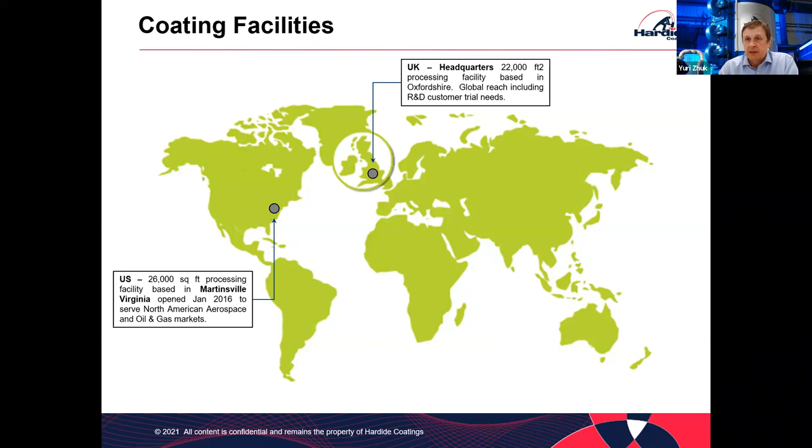First of all, to show locations of where we are working - I'm based in the UK, near Oxford, which is the headquarters of our company. We also have production facilities in Martinsville, Virginia, from which we serve the North American market. Hardide also has presence in Houston - Mark Anania, whose contact details you will have, is based in Houston permanently and is an experienced oil and gas industry expert. Thank you, welcome everybody.

We use a low temperature CVD at 500 centigrade. Typically we coat parts about 2 foot long, but we recently installed a larger reactor which allows us to coat up to 4 foot long components. Typical thickness of the coating is about 50 microns, so 2 thou, and hardness on the level of about 73 Rockwell C - so it's about 1300, 1400 Vickers. So it's pretty hard.

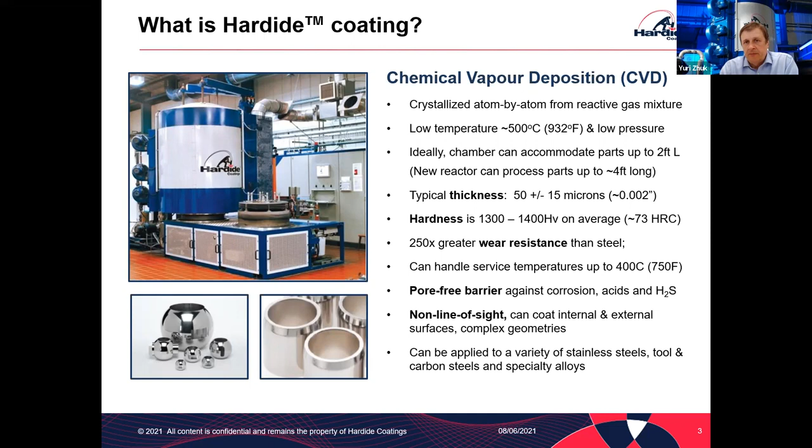As I mentioned, the coating is non-line of sight, so we can coat internal surfaces, external surfaces, complex shape parts, and we can coat a variety of steel components - stainless steel, tool steel, carbon steel, nickel-based alloys, copper-based alloys - various metals. We coat metals mainly.

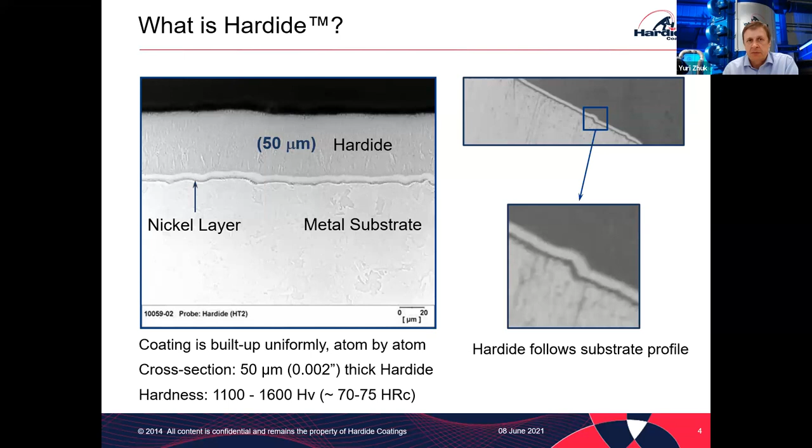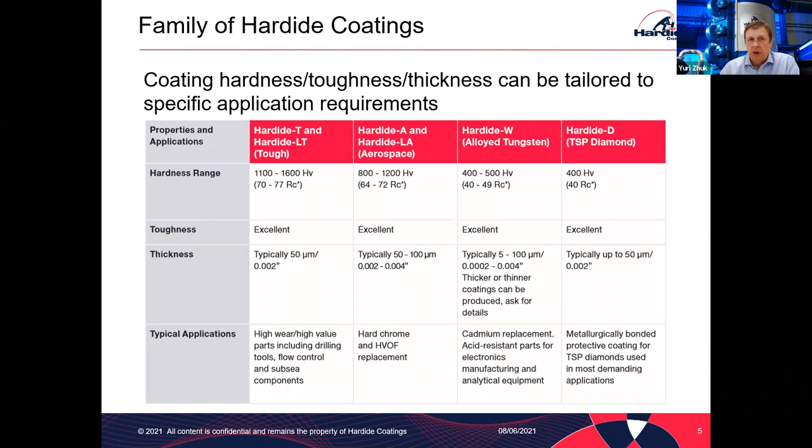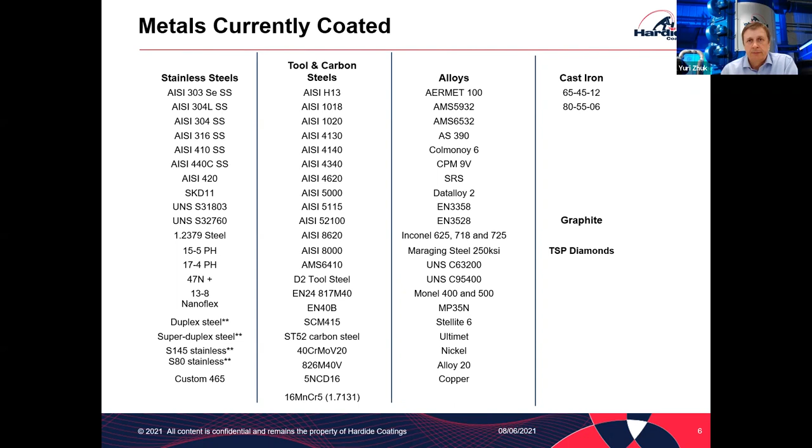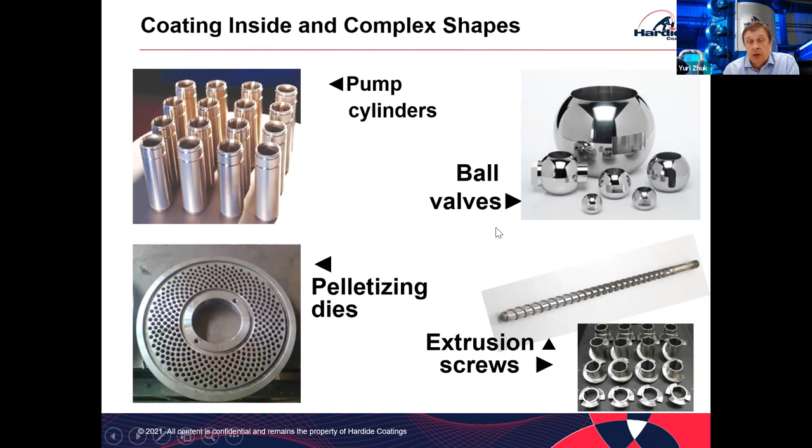Just a few photos to illustrate that ability to coat complex shapes. Pump cylinders we coat on the inside. Pelletizing dies have hundreds of holes, so we coat both inside these holes on both faces of the die. Ball valves, extrusion screws - they can all be coated completely on whole external and working surfaces.

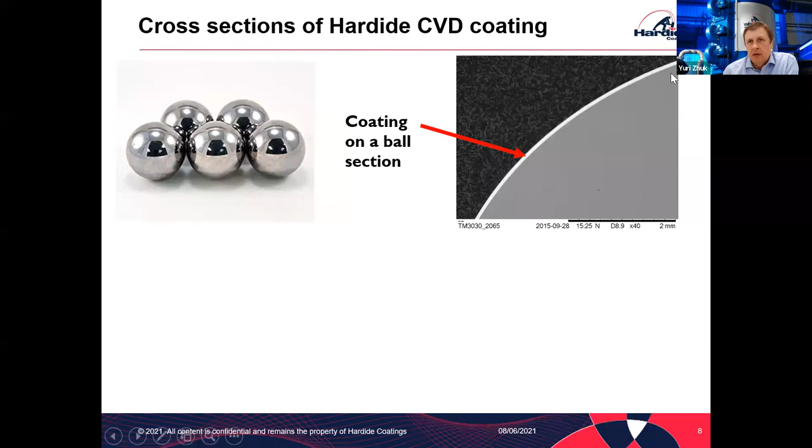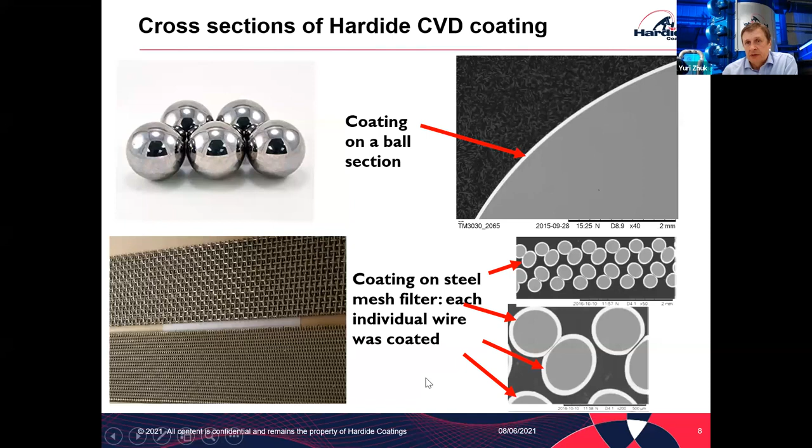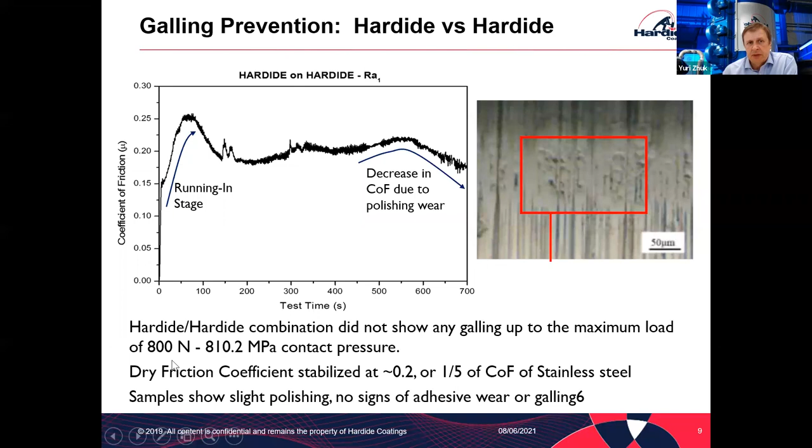The coating has very good anti-galling properties. When tested dry, hardide coated component against hardide coated component maintained a friction coefficient of 0.2, which is about 1/5 of a typical stainless steel against stainless steel. And the samples didn't fail even under higher loads, representing about 800 megapascals contact pressure.

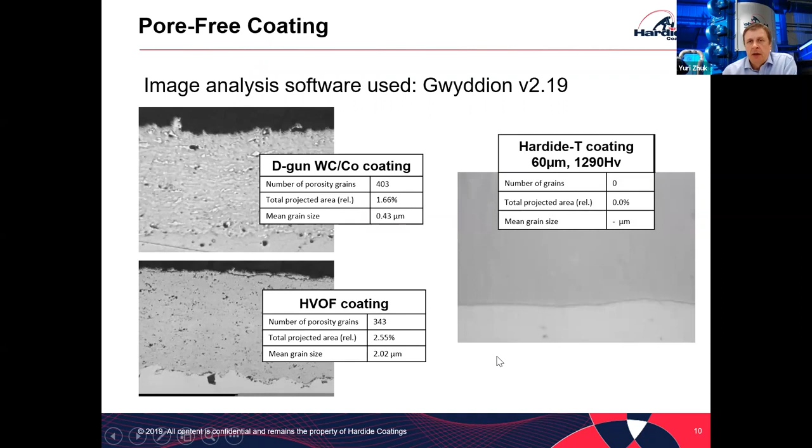The coating that we produce is pore-free. This illustrates that measurement method of porosity. And because of very, very low porosity, it can be a very good barrier against corrosion.

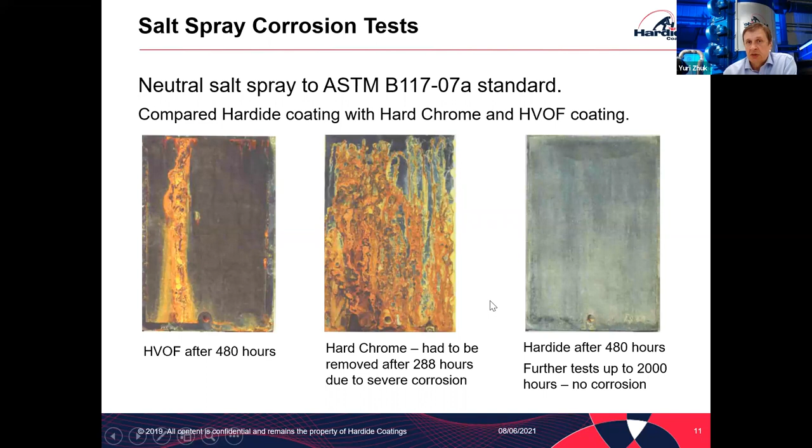What is shown on this slide is 3 different coatings: HVOF on the left, hard chrome at the center, and hardide on the right, after salt spray corrosion testing. You can see that the hardide coating did not show any signs of corrosion after 480 hours, and further testing up to 2000 hours still did not show corrosion. So it's a very dense, pore-free, good barrier against corrosion.

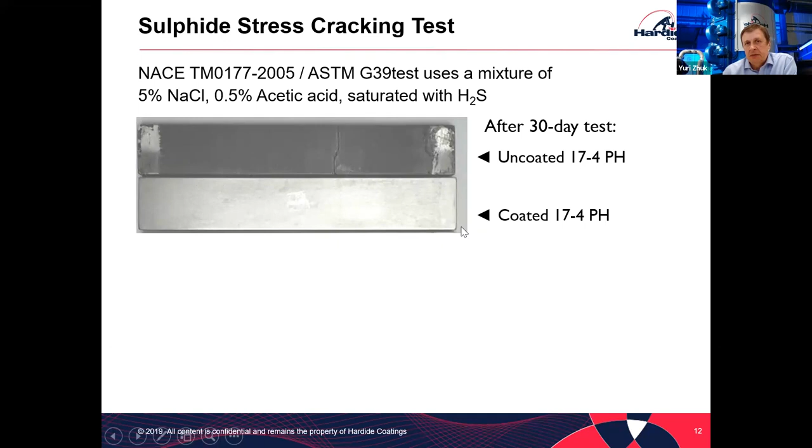The coating is used by practically all major oil service companies, in a variety of applications on directional drilling tools, tools used in fracking, pumps including electrical submersible pumps and topside pumps, valves, turbo drilling tools, and completion equipment. So there's a huge variety of components that we coat.

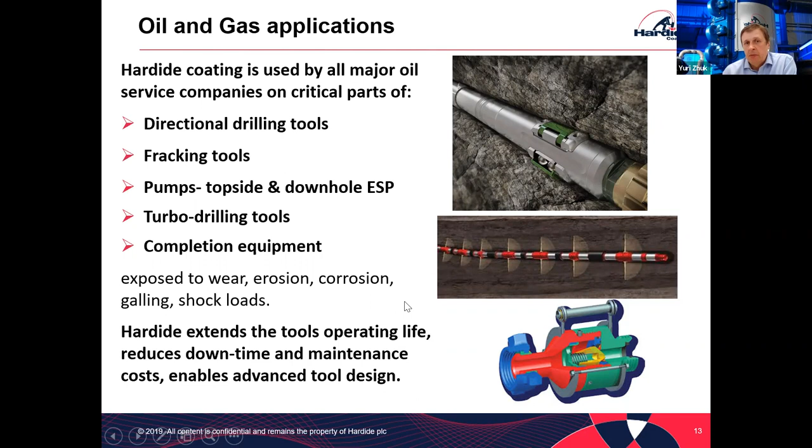Mainly the coating protects against wear, erosion, corrosion, galling. It can survive some shock loads. So the effect of using the coating is that tools can last longer, that reduces downtime, reduces maintenance requirements, and also enables our customers to design better tools, better products.

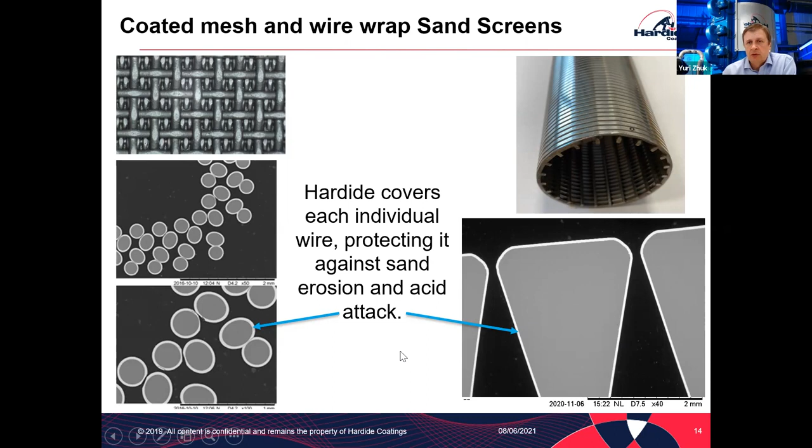This is quite an interesting slide showing 2 types of sand screens that we coat. The photos on the left show the mesh sand screens - you can see that in the cross section of the coated mesh, the coating surrounds each wire. On the right, that's a wire wrap type sand screen, and again the coating is a white layer surrounding that profile wire. By this, the coating protects the wires and the sand screens against erosion and also against acid attack.

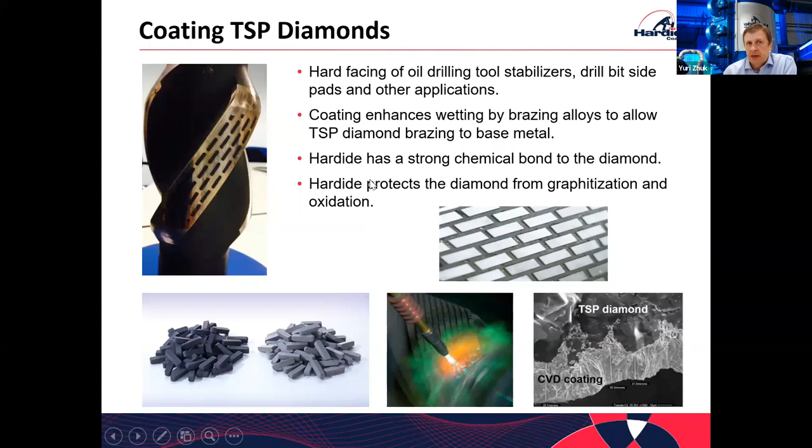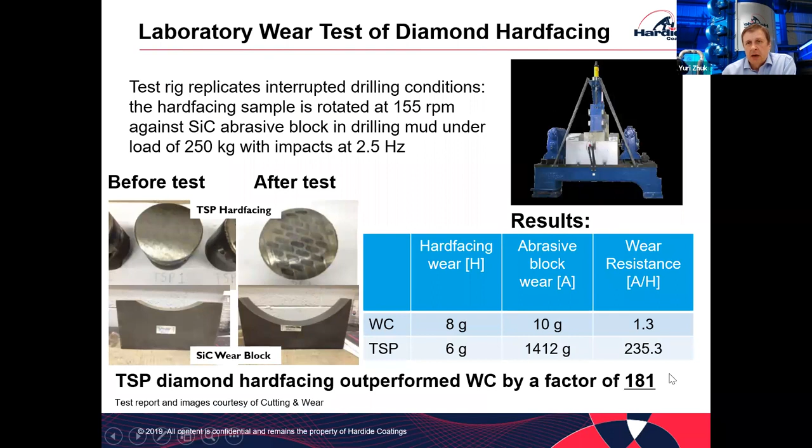We also coat TSP diamonds, which are used in hard facing. The coating enables brazing of that TSP diamond with much stronger retention because the coating has a chemical bond to diamond. Testing of the TSP diamond showed that they can outperform tungsten carbide hard facing by a factor of 181 in wear resistance.

Another interesting property is that the coating is seal friendly. In one application, the customer tested an oil drilling wash pipe, and what we saw after some usage is that the coating actually got more polished where it was in contact with the packing, with the seals. As a result, the seals did not wear. So the seals and the wash tube lasted longer, did not leak, did not require replacement, and allowed continued operation for longer. At the same time, the coating protected the wash pipe against corrosion.

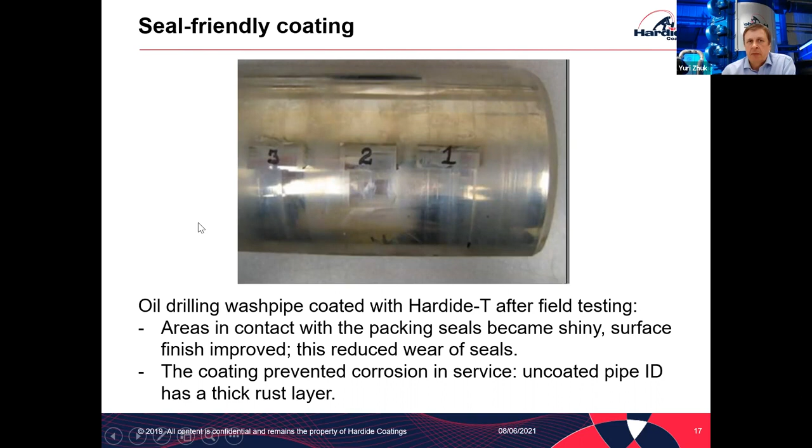There's a concluding slide. So just to repeat, the coating that we developed and produced is non-line of sight. So we can coat components which are very difficult or impossible to coat by thermal spray coatings or electroplating, including internal surfaces, external surfaces, and complex shapes.

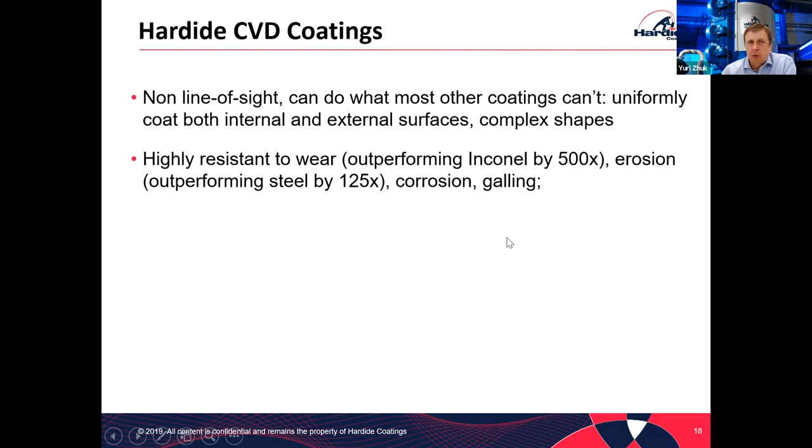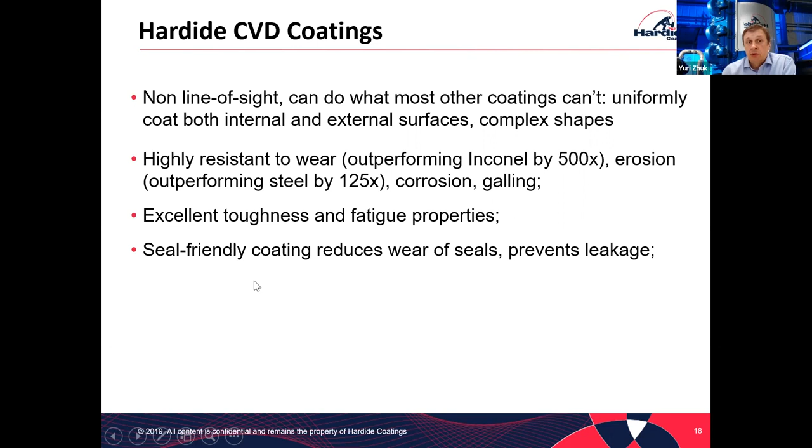It combines several protective properties in one coating. It protects against wear, erosion, corrosion, and galling. It also shows very good toughness, meaning that when used on oil drilling tools, it would survive shock loads, deformations, and impacts without failure. It's also seal-friendly, meaning a seal contact can last longer and requires less maintenance. It's already used on a variety of critical parts in the oil industry, but we are also very proud to say that our coating was approved by Airbus.

So we are coating flying components for some critical parts of Airbus aircraft now. Our coating enables companies manufacturing high-value engineered products to make their product even more competitive, because with our coating their products can be differentiated by lasting longer, requiring less maintenance, performing better, and reducing life cycle costs.